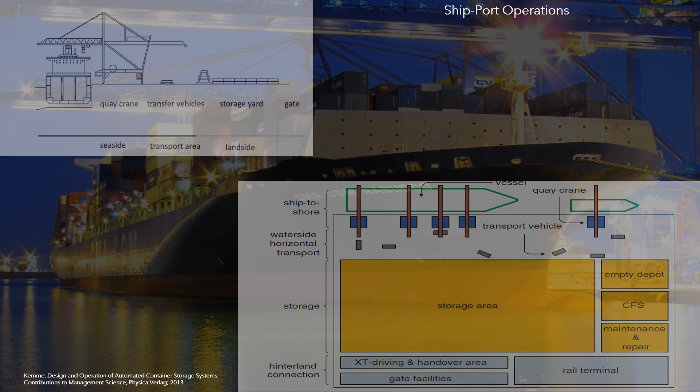For operations, the terminal area can be divided into three large parts: seaside, transport area, and land side. The cranes of the dock are in the coastal area. The transport area supports vehicle movements, cranes, trucks and/or trains.

Shipping service is one of the many routes, or itineraries, offered by a shipping line. The standard rule is that one or more boats may participate in a service. For the port, the following data of a service is relevant.

Type of arrival: irregular, randomly up every n number of hours; regular, up to a set time every n number of weeks. Regular services take precedence over irregular ones. And deviation: if the service is regular, the deviation is a probability distribution that indicates the number of hours a service can be advanced or delayed. If the service is irregular, it is a probability distribution that indicates the number of hours between arrivals.

Movements: it is a probability distribution that indicates the number of containers, or vehicles, or tons, that are embarked and disembarked per arrival, and minimum productivity required: it is the number of movements per hour that must guarantee the port to the service. The general information required for a ship is: ID of the ship, ID of the service, type of cargo - containers, vehicles, bulk.

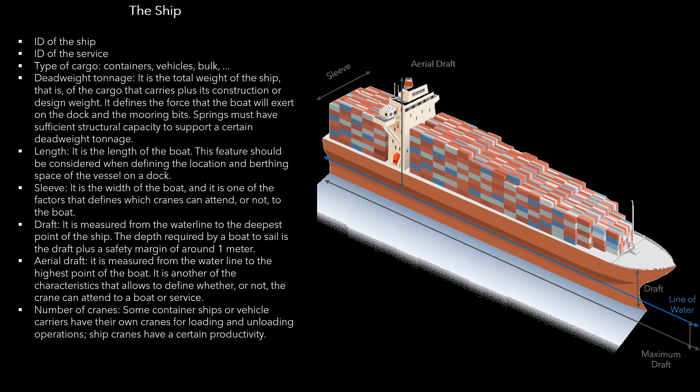Port logistics operations are described below. Assignment of terminals and services: it has a set of services with established itineraries and arrival patterns. Each service has a fleet of boats with set dimensions. It has a group of terminals with docks and cranes, of known specifications.

It seeks to assign ships to the docks of the terminals, in order to minimize the waiting time for services in the year. A service must be assigned to a terminal, but ships of a service can be assigned to different docks within the same terminal, and the maximum and average waiting time, per service, should be identified, and at what times of the week the greatest conflicts occur.

Assignment of docks and cranes. It has an assignment of services to terminals, with several annual movements per service. There is a connectivity matrix between services that indicates how many containers are moved between them. It seeks to assign services to terminals in order to minimize the number of transfers between terminals, while maintaining a maximum average waiting time over the service time.

Container transfers between terminals. Some disembarked containers are in transit and must be reshipped on other ships to other destinations. Among shipping lines, there are agreements for a certain number of transit containers to be left by one line at the port and then picked up by another. If one line arrives at one terminal and the other arrives at another terminal, a transfer will be generated, the cost of which normally must be borne by the port.

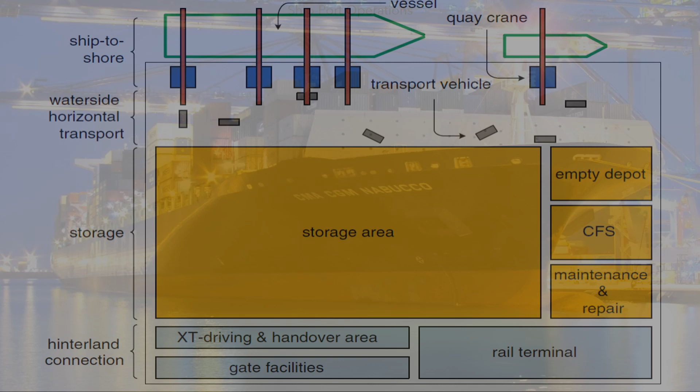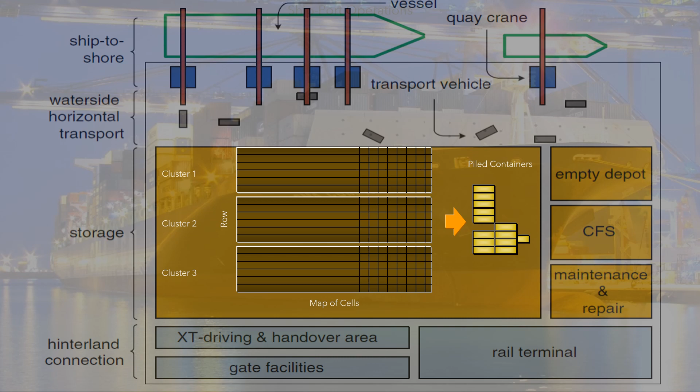The yards and the hinterland connection are in the landside area. The storage yards are organized into clusters, composed of multiple cells. Piled containers are vertically stacked container groups. A map of cells is the horizontal organization, at floor level, of the piled containers. In a piled container arrangement, each container occupies a cell located at a certain height, forming a row.

Port container operations. The container transfer operations in the port include transfers between the seaside area and the container yard, using ship cranes and portico cranes; transfers within the storage area using yard cranes; and transfers between the container yard and vehicles that transport containers out of the port, using yard cranes.

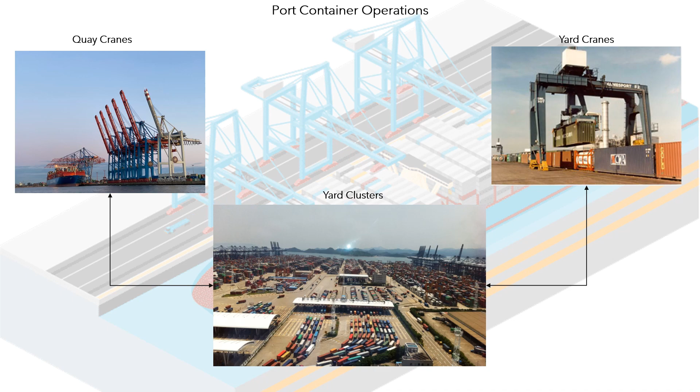The considerations in this process are aimed at improving the efficiency of container port operations. Problems: the time a ship is docked should be minimized, operations between subsystems must be effectively coordinated, and container logistics are highly complex. Congestion increases variability and reduces productivity, and space scarcity does not allow terminals to meet the rapid growth of container traffic.

Solution requirements: collect and consolidate the execution information of the different subsystems, and leverage mathematical optimization to address the complexity of interconnected subsystems and increase terminal performance.

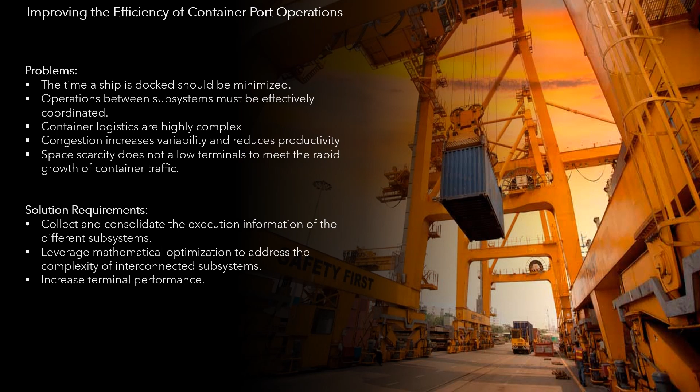Congestion at container terminals. In import and export terminals, yard cranes are a bottleneck. The availability of yard cranes generates congestion and delays in the loading or unloading program, and high volumes of empty containers lead to congestion. In transfer terminals, yard space is a bottleneck, dock cranes are a bottleneck, and space availability leads to reorganization, congestion, and delays in the loading or unloading schedule.

Better coordination between the dock and the yard is critical to smoothing the bottleneck. The bottleneck is shared between several vessels, therefore a holistic view of the process is necessary.

Optimization of loading and unloading operations. Problems: loading and unloading operations on different vessels and cranes generate congestion, and several containers from the same area must be moved to the dock ship at the same time, generating a yard clash. Reducing the yard clash is the key concern.

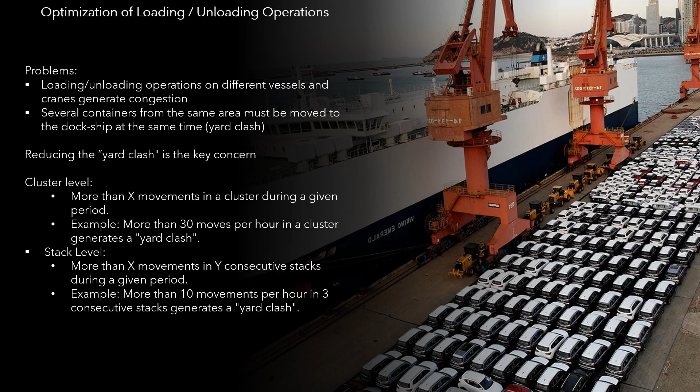At cluster level, more than X movements in a cluster during a given period generates a yard clash. At stack level, more than X movements in Y consecutive stacks during a given period also generates a yard clash.

The berth allocation process implies the ship must arrive at the terminal assigned to the service. A berth must be assigned to the ship, respecting the restrictions of the berth and the ship, and cranes must be assigned considering the assigned berth, the required productivity, and the cranes of the ship that will be used.

The interconnectivity of the models used includes: the demand model, forecasting arrivals and embarkations based on predictive analytics; the allocation of terminals and services model; the tactical planning optimization model; the berth allocation model; and the real-time scheduling model, which defines assignment of vessels to berths, assignment of cranes to vessel berths, schedule of services per berth, and schedule of services per crane.

Assigning services to terminals model. It aims to specifically assign the terminals in which the services will be served. To do this, it makes a simulated assignment of what could happen in the coming months across the set of terminals. The model is of a tactical type, since it must be used with a frequency of the order of months, according to the demand for services expected in the medium term. It is based on continuous time modeling using a stochastic mixed integer linear programming (SMILP) model.

Assignment of ships to quays model.

Its purpose is to produce the following specific items: the assignment of vessels belonging to shipping services to a dock that belongs to a terminal, and to a set of cranes that will serve the service. All of this considers the operating restrictions of both the vessels and each terminal, their docks, and the cranes of each dock. A detailed schedule by hours of the assignment of boats to docks, defining the assigned dock, the time of entry, waiting, operation, and departure for each vessel, and a detailed schedule of container transfers between terminals, considering the previous vessel arrival schedule.

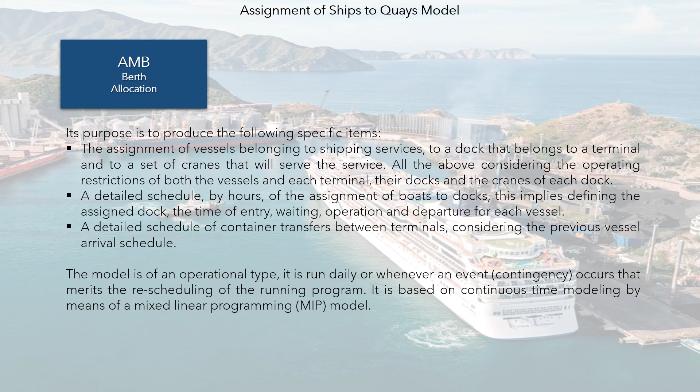Case: Port of Cartagena de Indias. The optimization software, supplied by a South American company to the Port of Cartagena de Indias in 2015, was developed using Optex, a technology currently owned by Hypothalamus Artificial Intelligence that is used to build artificial hypothalamuses, a methodology intellectual property of Hy. The main characteristic of the project was the challenge: to implement tactical planning and scheduling models to optimize the operations and commercial services of the port.

Solution: implementation of a set of optimization models for the definition of operations timetable, and the allocation of ships to docks and cranes to ships, to optimize the management of shipping services in the two terminals of the port. Result: the mathematical models allow optimization of port operations for planning terminal services assignments, planning big events in the port, and analysis of commercial opportunities.

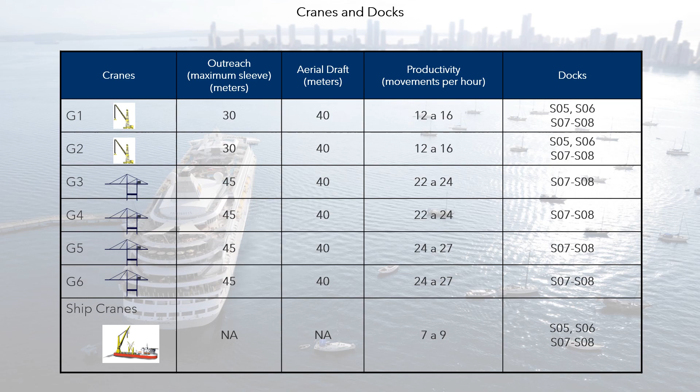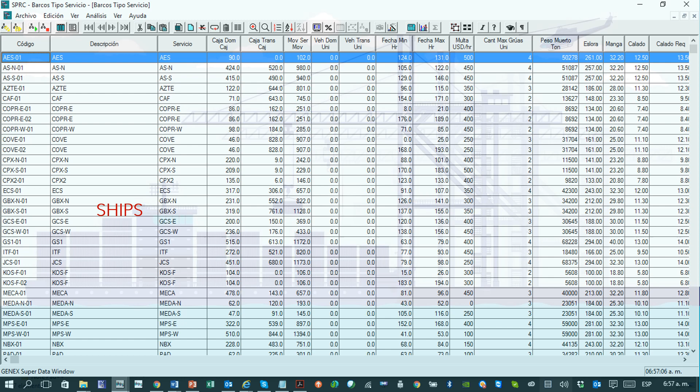The shell window contains the master table of ships. The shell window contains the master table of ships, and the tables of relationships between the ships and terminals and quays.

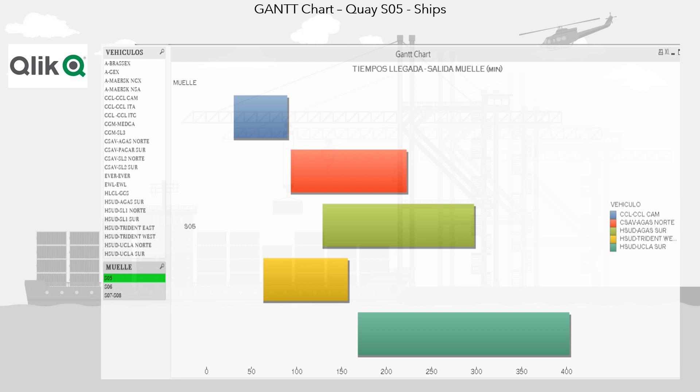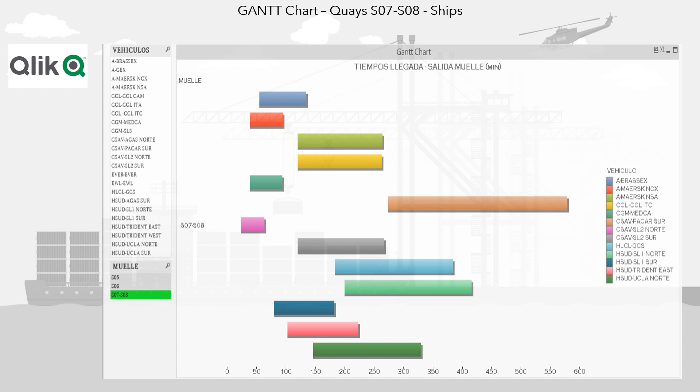Hypothalamus Artificial Intelligence. The creator of the artificial hypothalamus technologies.